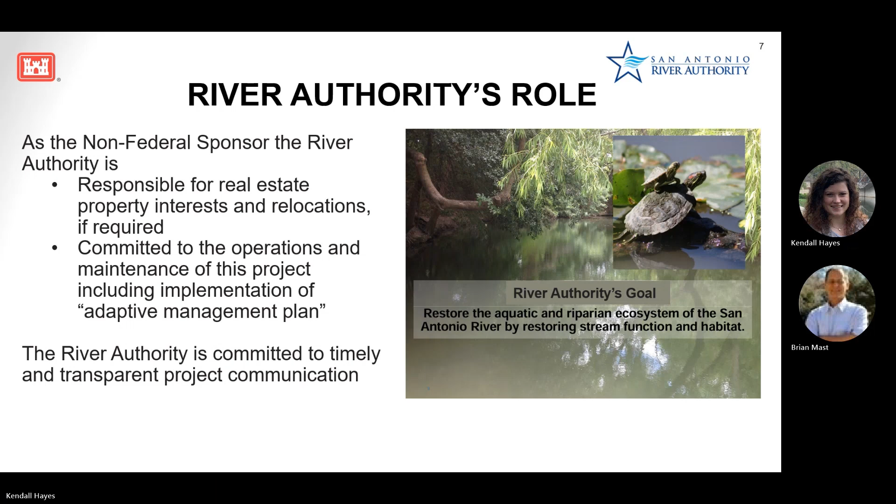Just to back up into the history of how we got here today, this project has been top of mind for a long time in the community. Starting in 1998 and running through 2008, there was a San Antonio River Oversight Committee that laid out a series of recommendations for projects they would like to see along the San Antonio River. This specific connection from Museum Reach to the Brackenridge Trail was outlined as part of that committee's recommendation.

In 2015, there was a federal interest determination made that led to a feasibility study that occurred from 2018 to 2020. The public review of that feasibility study is available on the project website with a recording of the meeting and links directly to the feasibility study if you have the desire to dive in deeper on what the results of that study were.

In 2023, federal funding was secured through the bipartisan infrastructure law, which led to our project kickoff in winter of 2024 when we held the last public meeting. So we are now in the design phase. This will occur from 2024 through 2025. We will bid the contract in 2026 and head into construction from 2026 through 2028.

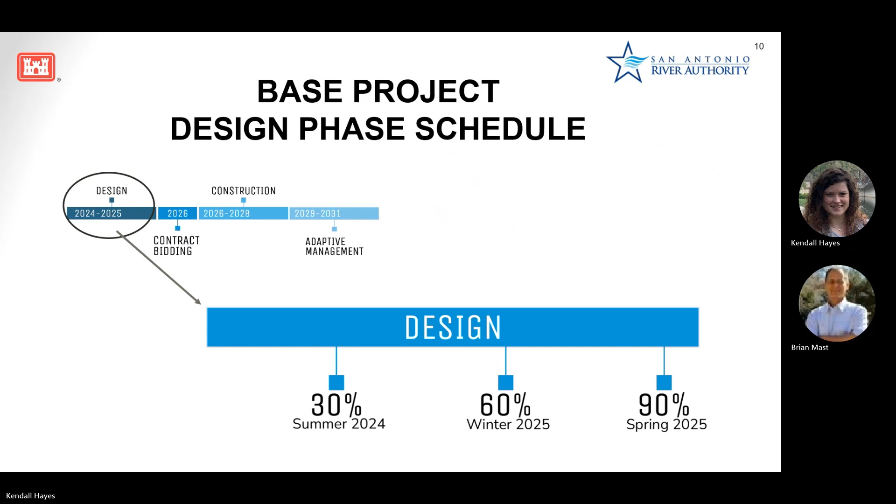Recognize some faces from the last public meeting we had. So a lot of these slides are similar to the last one. So bear with me as I talk to the people that are new here, or just provide a refresher for you guys that were here last time.

My name's Danny Allen. Can everybody hear me better? All right. My name's Danny Allen. I'm a wildlife biologist with the U.S. Army Corps of Engineers with the Regional Planning and Environmental Center. I've been on the project since the feasibility study got kicked off back in 2017, 2018.

The Corps of Engineers has a robust civil works program, and one of those civil works authorities gives us the ability to do aquatic ecosystem restoration, which is why the Corps of Engineers is involved in this study. It is an aquatic environmental restoration study, ecosystem restoration study.

When we start off with our projects, we always identify the problems, the objectives, the opportunities to solve those problems. We've got three sets of problems with the river road that have been identified: stream degradation due to excessive erosion, and on the flip side, stream degradation due to excessive sedimentation. Usually you want those things to balance out, but excessive erosion and excessive sedimentation together lead to problems with stream restoration.

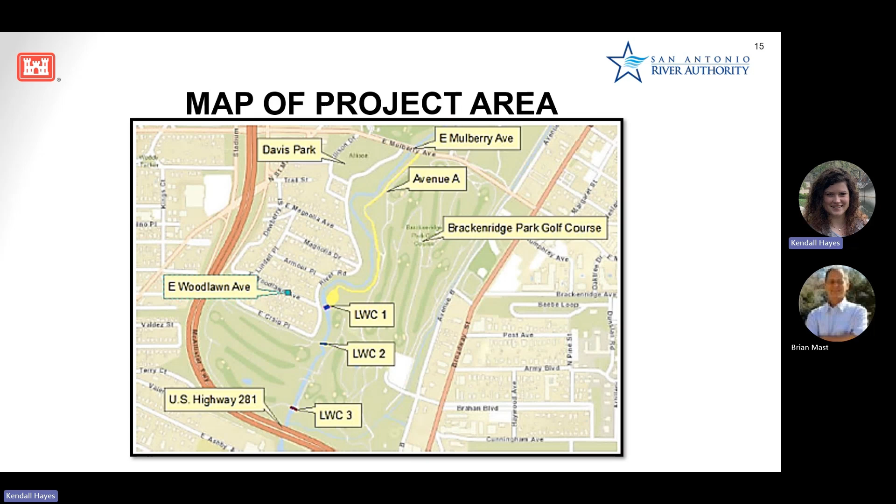Here's a map of the project area. LWC is low water crossing 1, then low water crossing 2 on down to the south side of the project area. Avenue A is outlined there in yellow as well, to give you an idea of what the landscape looks like.

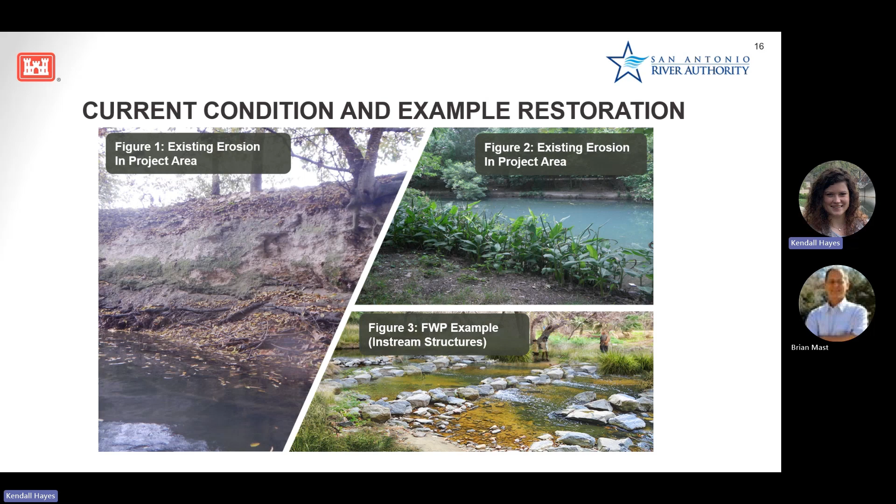The in-stream structures — we've got an example, and the design architects have more examples of these features as well. In figure 3 you've got what those in-stream structures would look like: naturalized rock or stone, or natural material, to blend in with the natural aesthetics of the river itself.

From those restoration measures, we receive ecological benefits. The removal of the low water crossing and the installation of the in-stream structures in combination will balance out that sediment transport, where the rate of erosion equals the rate of sedimentation, giving a balanced stream flow throughout the system.

It also creates a more diverse aquatic ecosystem by creating natural pool, riffle, run sequences in the river. The in-stream structures provide those riffle habitats, and they back up water a little bit, creating pools and runs.

The other ecological benefit is the removal of Avenue A. That allows us to widen the riparian width and plant native riparian trees and woody vegetation along the eastern bank of the river, as well as planting native riparian trees on the west bank where invasive species are occurring.

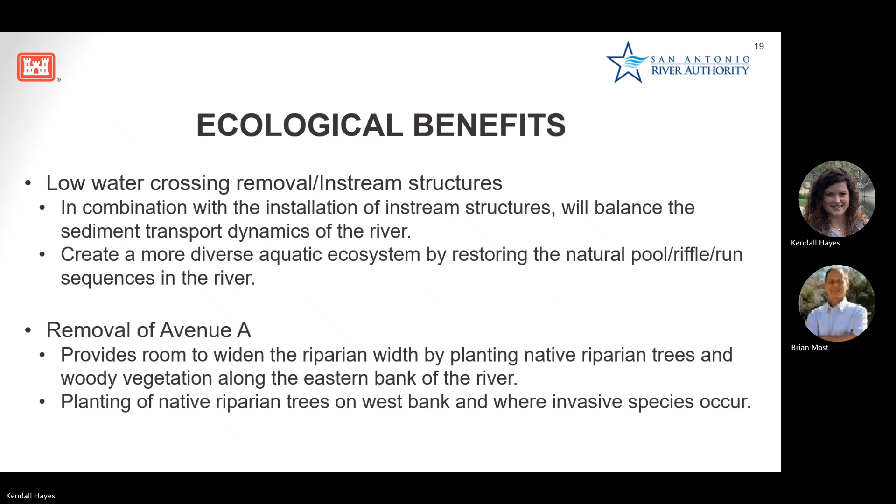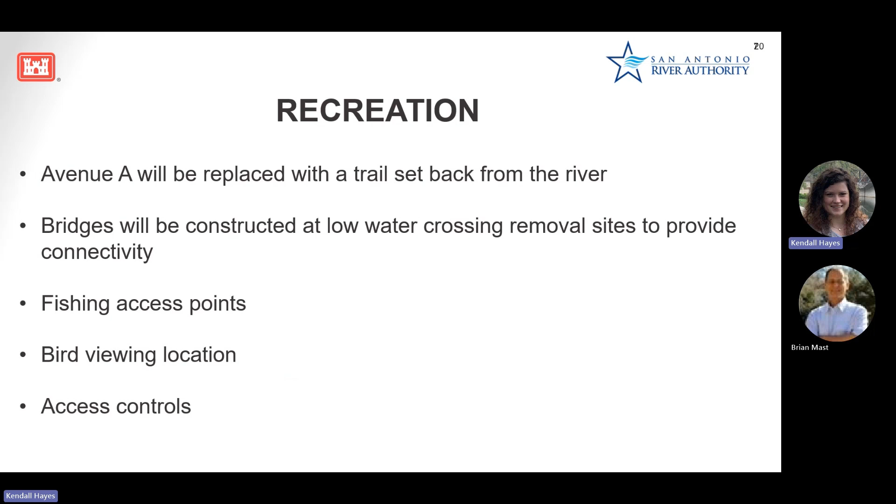Finally, there's a recreational aspect to the project. Avenue A will be replaced with a trail set back from the river. Bridges will be constructed at the low water crossings, as mentioned before. We'll provide fishing access points and bird viewing locations along the trail, and there will be access controls so the areas don't get trampled as much, allowing us to focus recreational opportunities into certain areas that let restoration take place.

And with that, I'll turn it over to Jim Wilson, project engineer.

Thank you, Danny. Good evening, everyone. My name is Jim Wilson. I'm with MSMM Engineering, and I'm wearing two hats for this project — I'm the project manager and the lead civil engineer. With me tonight is Brian Mast with Michael Baker International, a landscape architect, and he and I will share the next few slides together.

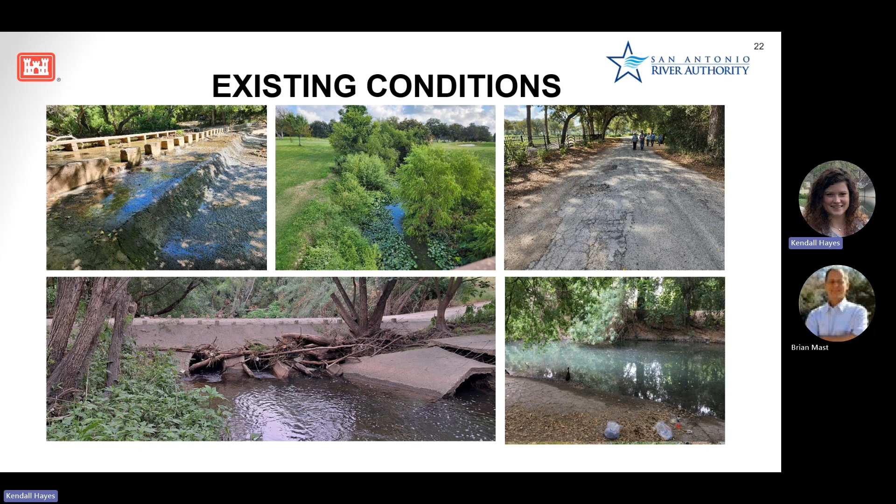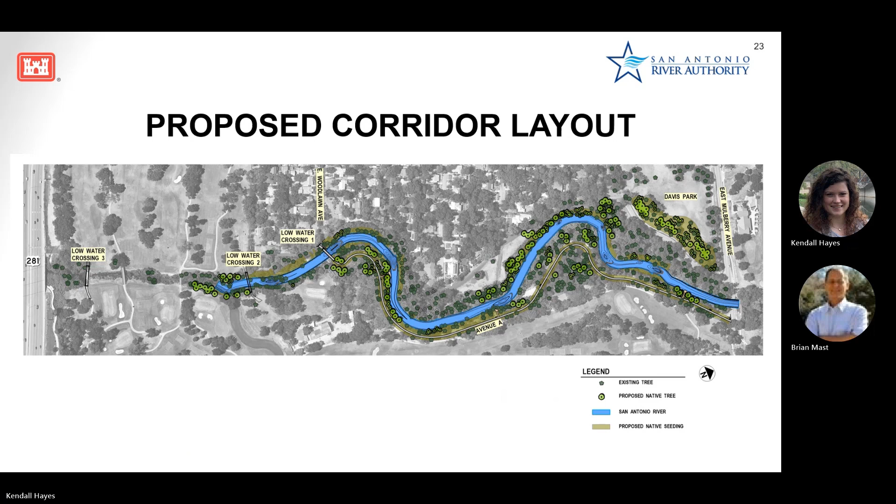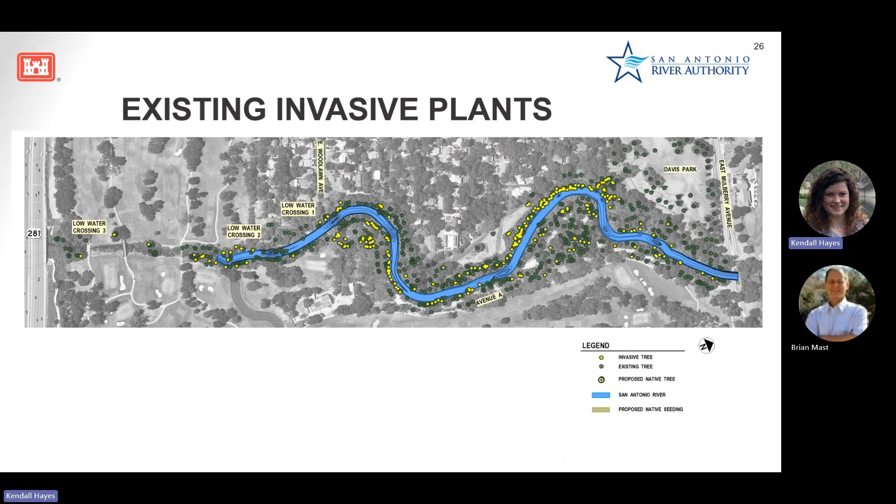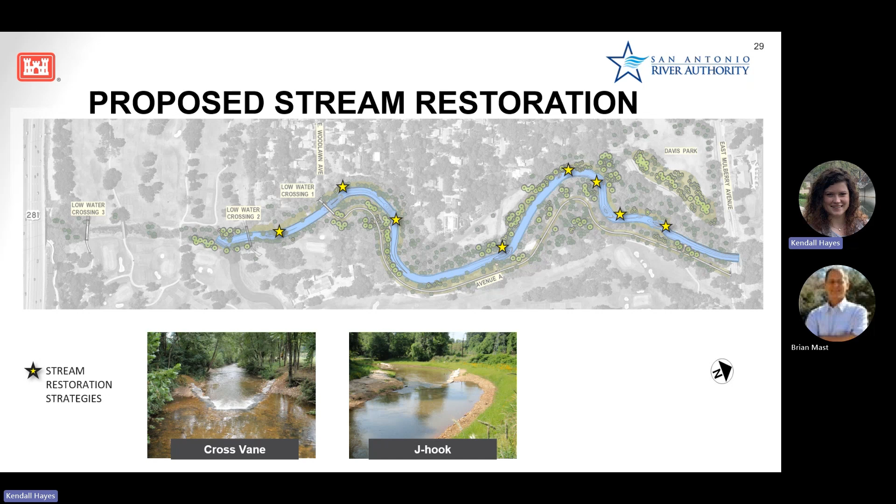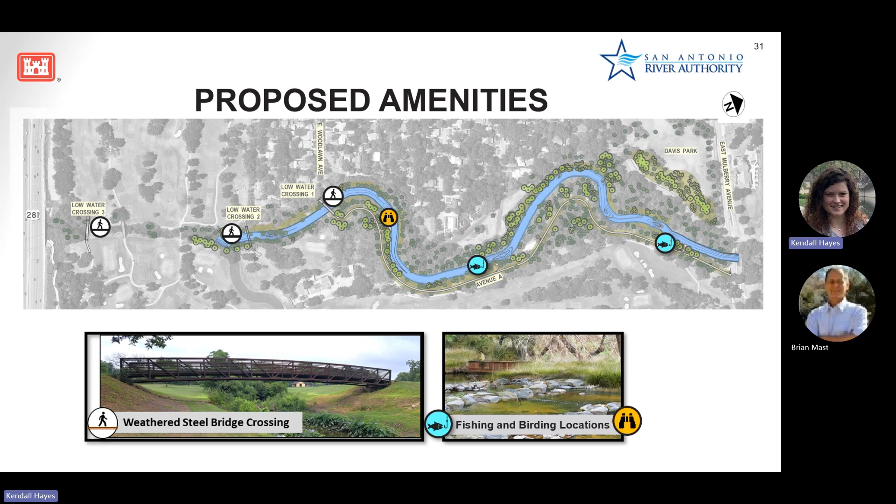This is Avenue A, which currently is a 2-lane asphalt roadway. We are proposing to remove that asphalt road and put in a new trail, then infill with new native tree plantings and native seedlings.

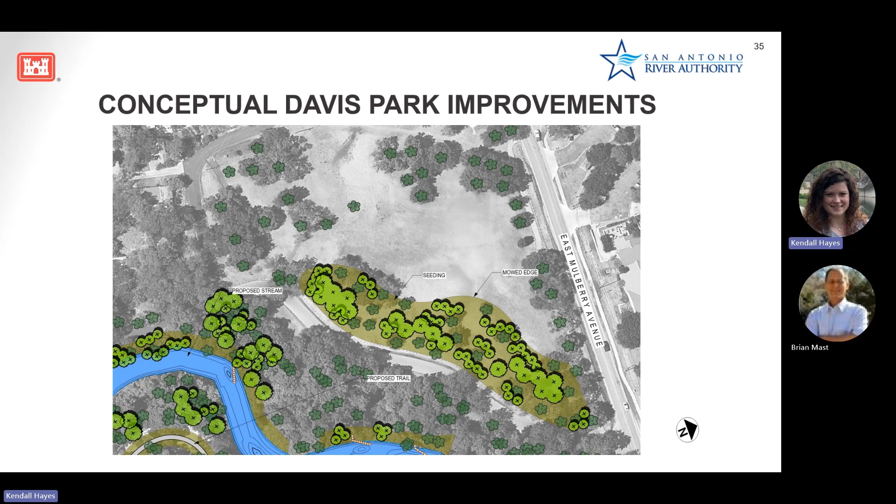Question: is there a plan to regrade both banks, or just that left bank, for Avenue A to be removed? It's still in the evaluation phase. I think in combination with knowing what trees are going to be removed, that'll play into it as well, so it's too early to tell at the moment.

More than likely, the cross vanes will be like natural boulders instead of a wood-type structure.

Regarding the acquisition - was there an attempted acquisition of portions of the golf course, or just? There's no land acquisition occurring within the project. No.

We have done the initial work - we have identified the species that are out there today. Similar to what we've done on the Mission Reach, through the adaptive management plan we have gone out and measured the percentage of native species and non-native species, and made management decisions based on how things are looking at that time. So yes, that will be part of the process.

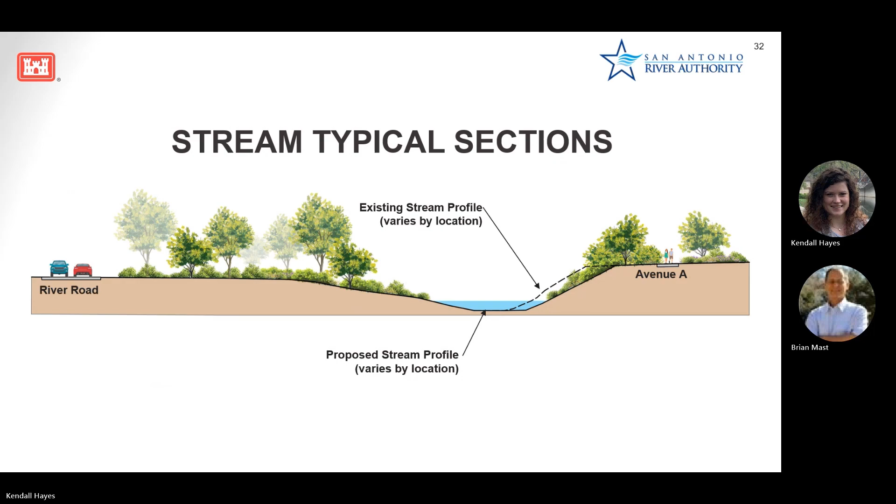No, we are removing 3 low water crossings within the project area. There are 2 more on the golf course that are being removed and replaced.

Now, my question is this: how will the board ensure that River Road neighborhood residents' property values will not decline because of the construction phase from '26 to '28, nor during the adaptive management phase from '28 to '31? I can't make that promise. Well, that's an issue I think we need to somehow put on the table.

Then what is the process for this project where you contact staff? We already had contractors from a company working there, looking for something—they had sheds, they were doing something. When we asked them, people called me asking what these people were doing, parking in the park. They started parking not 1, but 2, and 3 trucks because it was shadier. Some employees said it was because they had heavy equipment, but people watched them all the time and didn't see that. So we didn't know what to do—we went and asked who gave them the permit, and went through 6 city departments to find out they did not have permits. So we need to know, if the River Authority is going to be in charge, who's going to be the general contractor?